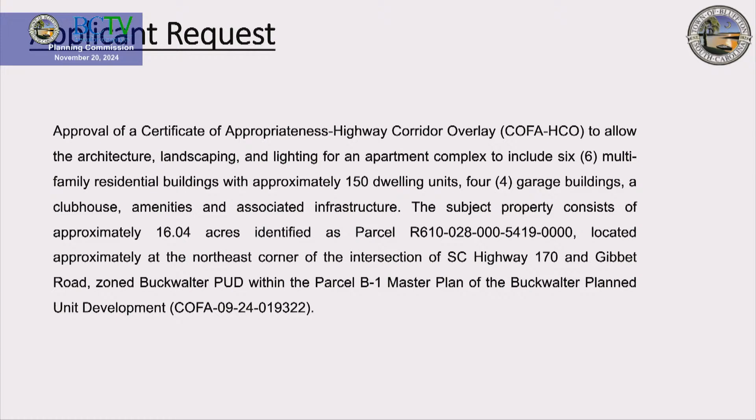Charlotte: Excuse me, thank you for the introduction. Let me get right into it. Again, this is for the architecture, lighting, and landscaping. Dan will be presenting the portion about landscaping. So let me go ahead and jump right into the location of the property. As you indicated, it is a 16-acre property of a former 22-acre tract, located at the corner, northeast corner of Highway 170 and Gibbet Road.

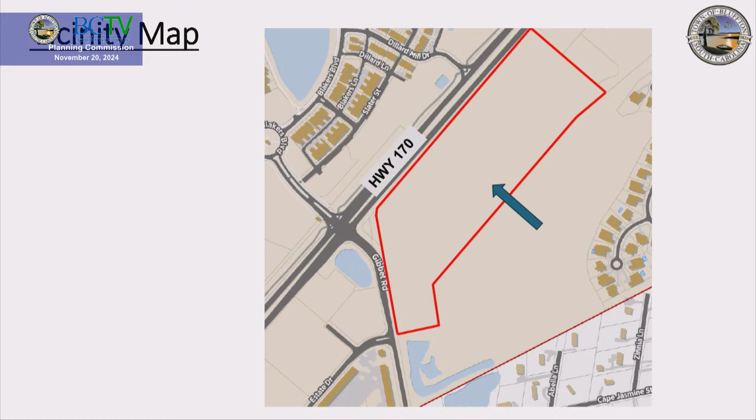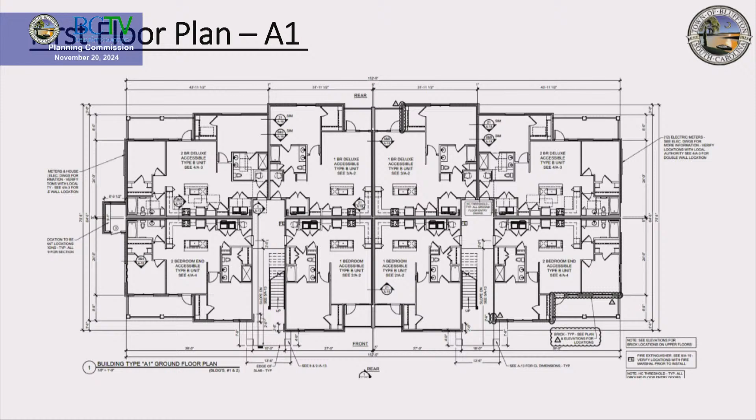So I have a bunch of slides relating to the floor plans, the architecture, and the roof plan for each building. I'm not going to go through each one. These are for us to reference, but I just want you to be aware that I have them all. I have a ton of slides, so I'm going to go through them very quickly.

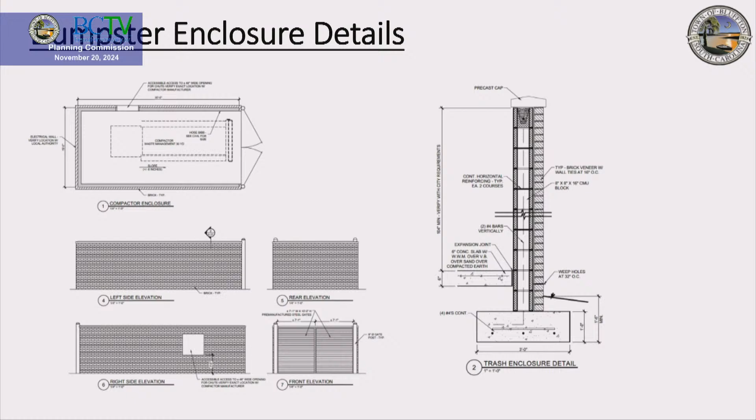And I've got some sections as well. Let me, sorry, there's so many slides here. It's kind of hard to know where to kind of jump in on this.

Dumpster enclosures, mechanical details. We'll need to talk about HVAC placement on the roof. There is some concern with that as it relates to visibility from the highway.

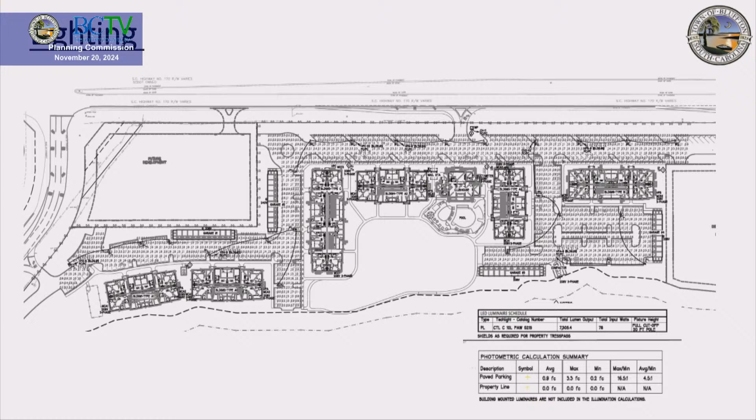And then the landscape plan, Dan will talk about that in just a moment. And then the lighting as well. I do want to indicate that the lighting, the photometric plan that was presented was fine. We did ask for some additional information regarding the various light fixtures. I did receive one with the submittal, and the applicant provided the rest of the fixtures today. So there is no concern with that.

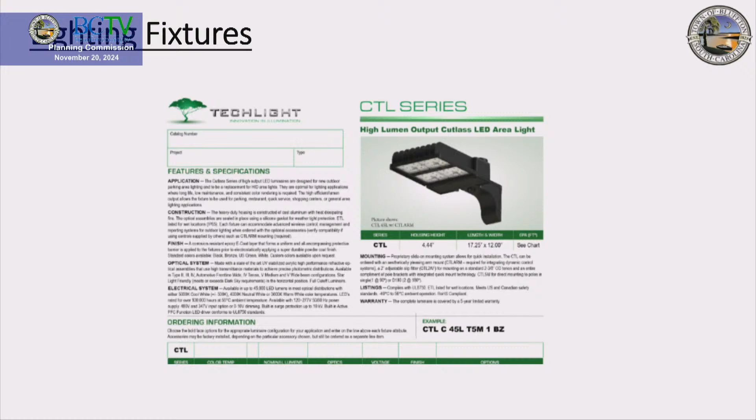Going back through the comments from staff, we didn't have too many, but I do want to talk about them in just more detail in just a moment.

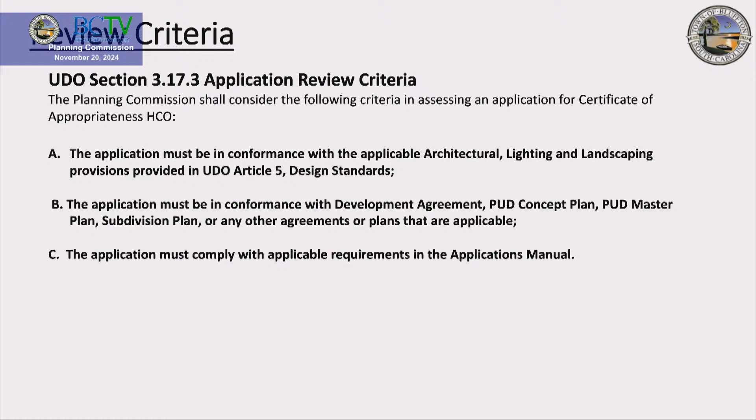As you know, there are several review criteria that have to be applied in the review process and your decision-making, and I have provided them there. This particular application would need to comply with the design standard requirements of the UDO and be in conformance with the Buckwalter Development Agreement, the PUD concept plans, the master plan, the subdivision, and any other agreements that there may be, and also consistent with the Applications Manual.

The various actions of the Planning Commission include approving the plan as submitted by the applicant, approving it with conditions, or denying the application. So I want to go through my recommendations, and then we can kind of back into the plan as well.

There was a little bit of concern regarding the ground floor of each apartment building. When the plan was initially submitted, the front of the buildings had brick going all the way up to the second floor, but in the rear and sides, the brick only went up halfway. There needed to be consistency, and it was staff's recommendation that the brick extend all the way to the second floor. After reconsideration and looking at the plans today, we felt the long rear elevations of each apartment building were articulated enough that this particular recommendation is no longer necessary.

As I indicated previously, the rooftop mechanical equipment is a little bit of a concern, and our recommendation is that it not be allowed to extend beyond the parapet wall, that it be completely screened, and if it should be constructed and be visible, then that could be a reason to potentially halt construction.

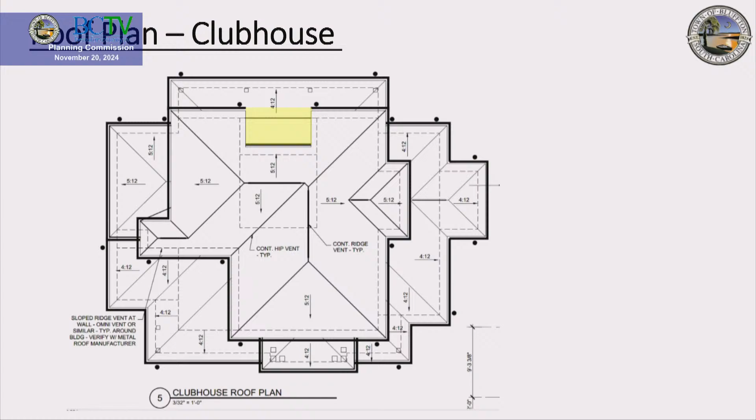Previously there was some inconsistency regarding the height. Let me talk about the roof plan. As you can see here, similar to the other building types, we have the HVAC equipment located on top of the roof instead of on the ground.

I understand there may be some concern looking at it from a side view as you're driving down 170. That front area will be buffered, though of course it's going to take a little while for that vegetation to grow. That's something I think we probably need to talk about in some further detail.

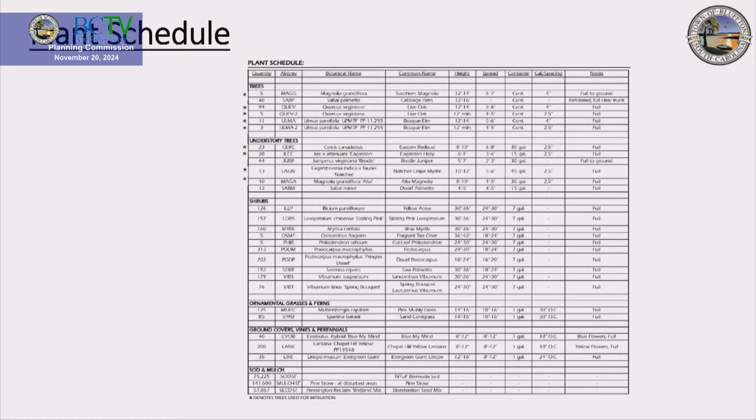While I mentioned buffer, let me go to the landscape plan too. I'm kind of bouncing around here a little bit tonight. Let me have Dan talk about this plan.

Okay, Charlotte just went over the architectural and the lighting. The third thing that's reviewed for the COFA is the landscape plan. We worked closely with the applicant and Witmer Jones Keefer on the landscape plan. Over the entire site, only 2 trees were in excess of 24 inches. So when you drive by and look, it looks like there were lots of trees on site, but only 2 had reached 24 inches. What we worked with them on was one of the requests, the requirement is 15 trees per acre.

The subdivision had been, the subject parcel where the properties are now, it's been subdivided. The applicant is the owner of the parcel. It comes out to 16.04 acres for the subject property. 86 trees remain on site, and what they're proposing in their landscape plan is 31 trees at 2.5 inches caliper, counted 1-to-1, so 31 trees there.

Then 110 trees would be calculated at 4-inch caliper, counted 2-to-1, that's the table on the landscape plan in your packet. So adding it up: 86 trees remaining, plus 31 trees at 1-to-1, and the 110 trees at 4-inch counted 2-to-1, so that's 220. 86, 220, 31 adds up to 337 trees. Over 16 acres that works out to 21 trees per acre, well in excess of the 15 trees per acre requirement. We did work closely with them back and forth.

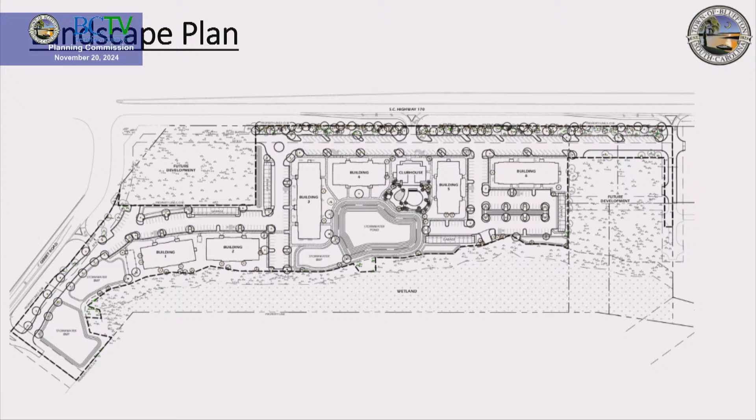Good evening. My name is Adrian Dana Miller with Millstone. We are the owner and developer. Also with me here I have T. Player from Parks Player, who's our architect, and I have Caleb and Brian from Witmer Jones Keefer. We're just here to answer any questions you have tonight and hold any discussion about our application.

So thank you. Just one comment before you go away - when you came to DRC for the HCOD to kind of get a feel for this, it was made very clear to you that we aren't messing around with the tree requirement. I appreciate that y'all paid attention to it.

You're probably going to get beat up a little bit on the architectural in a minute. Just keep in mind, we appreciate what you've done so far. Yeah, well thank you very much. And we appreciate staff working with us to figure that out and figure out a way that we can make it all work.

All right, I'll stay up here and field questions, and if anything gets sufficiently technical I might call on the reinforcements back here. That's fine. Okay, I don't know how we want to start or open it up, but I know there were several of us that had certain concerns with some of the architectural things.

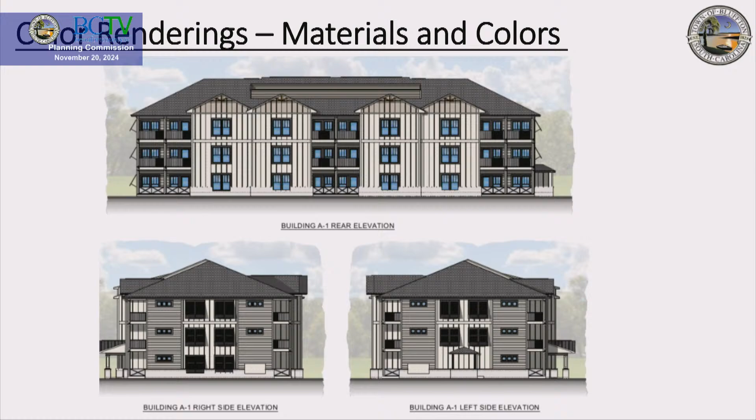Oh, getting lost. Yeah, okay, it's the clubhouse. Yeah, that's why. There's 5s on these, so we're not consistent with our pitches? You just passed it. Which one am I, were we on? Right back to where you were with the yellow. No, that's not it, it's roof plan A, technically, that's what we're talking about.

There you go. So we got 5 and 12s coming down on the front. The gables are 6 and 12, just the same as the ends of the building.

So pretty much any apartment project you're going to see, you're going to have different pitched roofs going front to back, side to side. Why do they do that? It just, why do you do that? Yeah.

Well, the gables are going down like that, so the sides should match that. My opinion would be one of the reasons you do that is because on the 6 and 12 roof, the higher pitch really climbs high into the air and it just looks like a massive roof. So that would be a reason to lower the pitch in that direction a little bit, so the building doesn't look like it's half building and half roof.

It's just a design standpoint. If you keep the same pitch everywhere on the gables, if you drop those down, we feel like they're not going to really meet the intent of the code. And if you do a 6 and 12 everywhere, as Adrian said, it's just going to raise that whole roof up. Just looking at this though, a 3 and 12 into a 5 and 12, and even a 6 and 12, but especially going from a 3 to a 4 into a 5, that is not a small raising. Those are almost the same pitch, so they're almost parallel. That roof is going to come up quite a bit, and I'm not sure it's going to be a problem, but it's something we would need to see.

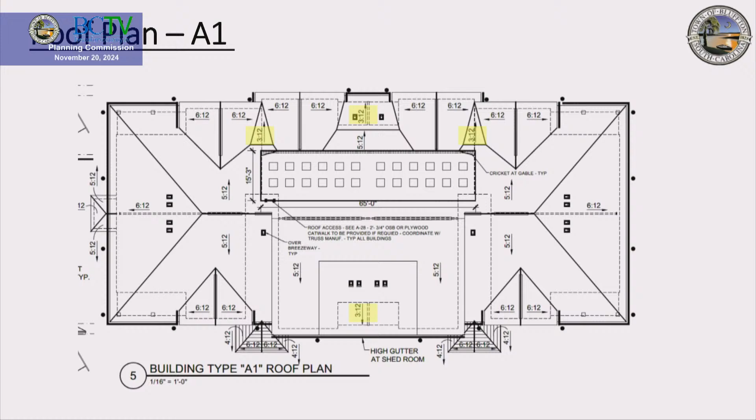While you're on this roof, we're looking at the A1. The board and batten you see right here on this one, do you think that's too wide? The reason I ask is because I know we changed that to 16 inches on center. The clubhouse, I do not recall off the top of my head if we changed that from 24 to 16.

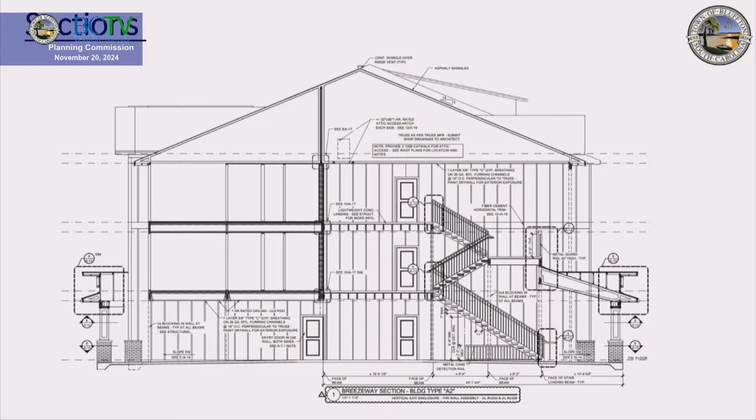That looks wider. It almost does look wider, and I don't see a lot of 12 inches on center - I see mostly 16 or 24. We can do whatever you guys want, but with the elevations here on the apartment buildings, if you guys thought that looked appropriate, or if you would like to see it go down.

I already got lost again. Well, it just ended, so everybody go home.

Go back to the roof plan - go to the cutout of the AC. Do we want to finish answering his question about board and batten?

16 versus 24, or versus 12? We know the 24 is not right, but I didn't know if the apartment building board and batten spacing looked okay to you guys, or if you want that tighter.

That's this one right here. That's correct. Still looks kind of wide.

Let me ask, if we go to one of the sections, like through the staircase - I don't know where those are, but I think it was still really bad. There, okay, what size are those doors?

Those doors are just going to be a typical 80-inch tall, 3-foot wide. So then that board and batten spacing is more than 16 inches.

I imagine, I should say this - on the front elevations, we changed it to 16 inches on center. On the stairwell section you see right here, it is still at 24 inches on center. Just thinking out loud - 24, 20, well...

Honestly, if you got 16 plus 16, that's 32, and you have a 3-foot door with casing on it. So I don't know - it looks like it's still wider on this, I agree.

As you can see, the theme is we need some updated drawings to be able to know what's going on.

Is 16 agreeable, or are you saying... I think 16 could be agreeable, but I don't believe all your drawings are drawn as 16. I think a lot of them look too wide. I'm 100% sure that the elevations on the front and rear are 16 inches on center on the apartment buildings, but not the clubhouse.

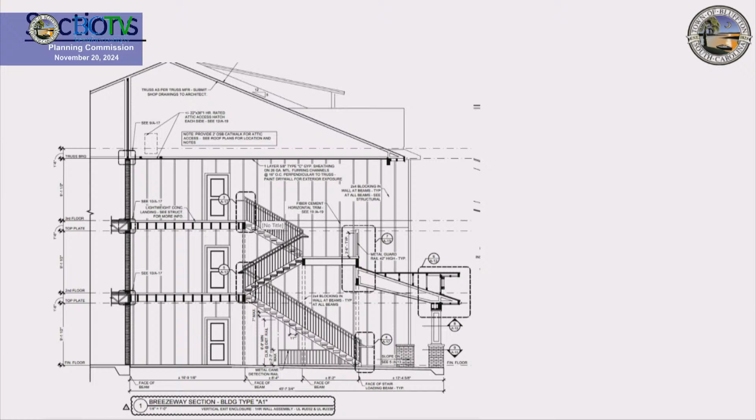Well, how wide are your windows? 3 feet. So they're not 16 - that's the side, he's saying the sections are wrong. No, the front elevation of the buildings, if the windows are 3 feet wide - the clubhouse?

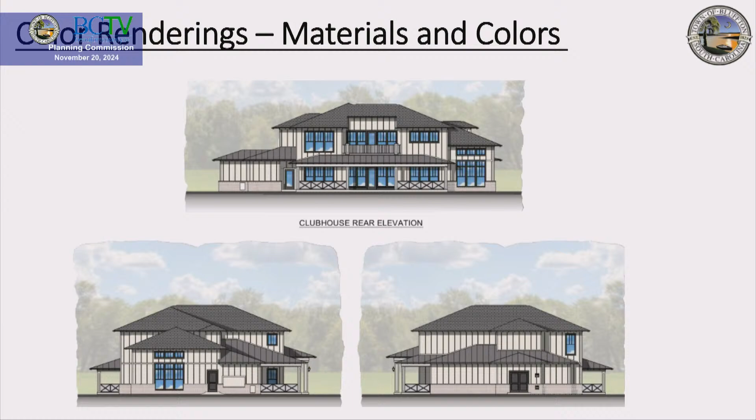Not the clubhouse, go to the other apartment building - Apartment Building A. Pick any one you want. Pick a building, any building.

So if those are the ones centered in the gable end, and if that's a 3-foot wide window, those are not 16 inches on center. Are you sure it's a 3-foot wide window?

Gotta need that for egress. Well, yes, you need a 3-foot window for egress, but I'm just saying I think 16 could look good. I just don't believe these drawings are drawn to be 16 inches, which is part of why we're having the reaction that they're too spread apart.

I'll be all right with 16. At the very least, it's inconsistent between the pages, and the clubhouse and the building. All right, well, let's move on from that. It sounds like we need to revise it, make sure it's all consistent, and confirm all that.

Okay, so now Charlie's thing was, are we okay to move to Charlie's AC unit section? Charlotte, please? We dealt with the architects, now you gotta deal with the AC guy. We're not done, I know, we'll get back to you still. This is a commercial break. If you pause.

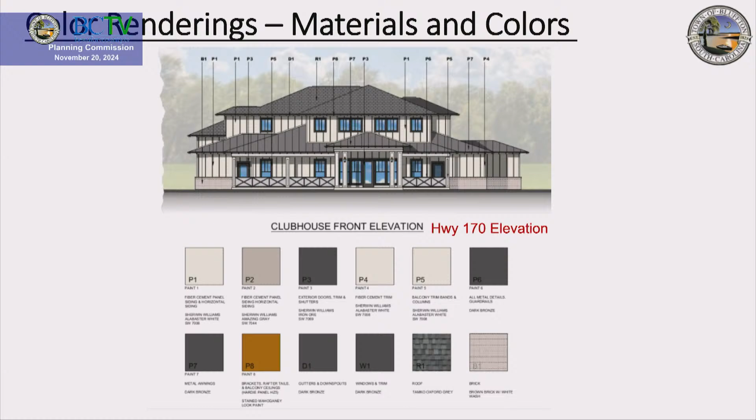Can go to the, well, there's your rooftop drawing, but I'm looking at the section height through it, the cutout of it. If anyone to my left, other than Charlie, has any comments, please feel free.

No, I said 16 on center for me is fine. I think that makes sense to Michael too. I like that, so I'm good. And I'm okay with 16.

Let's just be clear with what we want from them. You're showing units at 33 inches tall. You're showing a parapet at 42 inches tall.

Actually, before I get into the measurements, this is a cutout. The parapet railing will go on the sides as well. Correct, that's correct. There'll actually be roof on the sides that screens, just come down into the roof. Well, yeah.

It's not tall enough at 42, and I'll tell you why in a minute. You do not want to build a 42-inch wall and put those AC units in and have them visible, because they will shut you down. That is one of the things that's very, very much a no-no.

We let a couple buildings get away with it and it looks horrible. You have 33-inch tall units, let's assume that's correct, even though refrigerant's changing and dimensions are changing. They have to be put on, at the very least, 4x4s on the roof, they won't be sitting directly on it. So now you've got another approximately 6 to 8 inches. You're talking 33 inches plus 8 inches, now you're up to 41 inches with a 42-inch parapet. That's way too close to risk on.

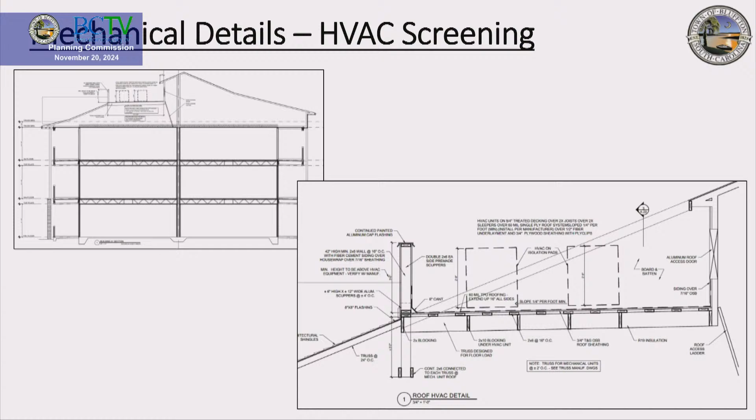Agreed. Can we look on that same point at the side elevations, please, of any of the buildings? Not the clubhouse, but the apartment buildings. So where is, if you look at the rear elevation of the buildings, I guess maybe we should start there and then we can get to the sides.

If you could flip one more. So it looks to me like that parapet wall sticks up beyond the side gables, and it doesn't show up anywhere as any type of visual on the side elevations. So what are you planning for that? I mean, to be honest, until I look at the section, I can't tell you exactly where it's going to be, but it's above the ridge, it's going to be above the ridge, the top of the parapet, potentially.

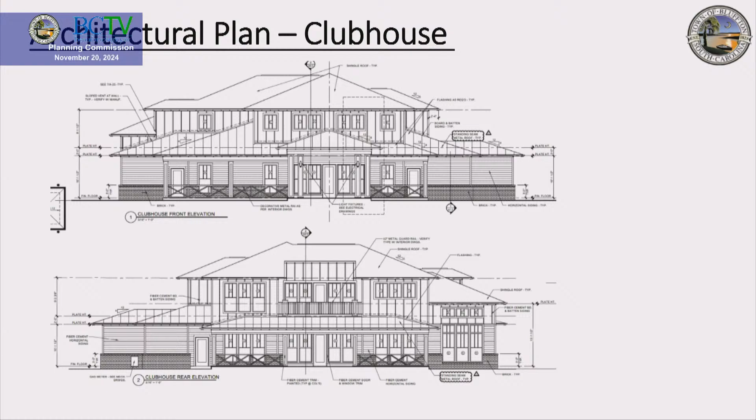Can we go back to the other view? In general, she's just saying it's not shown, the one showing the rear elevation. Unless it's blocked. It's not. It's higher than those roofs. You were on the right, it was just one sheet up from where you were before. Yeah, wrong way. More than likely it was just a missed detail.

There it is. The issue I have, though, is that two of the buildings, 3 and 5, I believe the short end of the building is facing 170. I think it's up to you how you want to handle it, but from my perspective, I do not want to see that tacked-on parapet wall from 170. So if you could raise the gable on the ends to have the ridge of the gable higher than the parapet, or put the parapet down lower in the roof, or something.

Or you can put it back further. I don't know how far you would have to put it back so that the walls can hide the parapet wall. But I'm not sure that would be practical. And I don't know how everybody else feels, but I don't think usually when we have parapet walls, it's not like an architectural parapet wall, it's really just kind of tacked on.

So can we go to the site plan real quick for this discussion? I think it shows on there where these are located. I'm hoping it kind of does. It's really small on here, but you can see how these mechanical wells are all positioned to the rear of the building. But there are a couple that could potentially be seen from 170, the ones that face buildings 3 and 5, running north-south instead of east-west. Yeah, 3 and 5, and we're going to be talking about the ends of those buildings too.

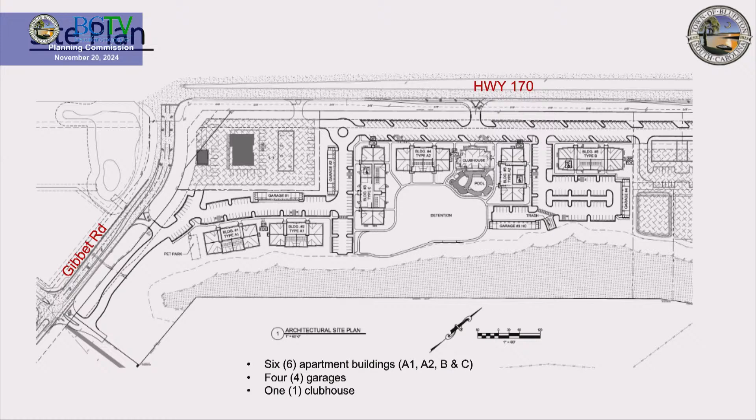While we're on those two specific buildings, 3 and 5, unless you have any other roof or AC issues, I think there were some issues with meters or service things on that side, on 170. And that is our HCOD, so that's our main view. Yeah, and those do need to be moved, the screen, the electrical, and the meter panels. This is Highway 170, what we're here to discuss.

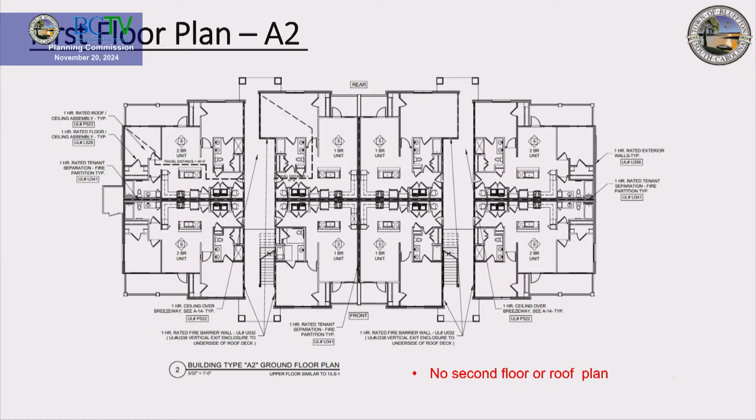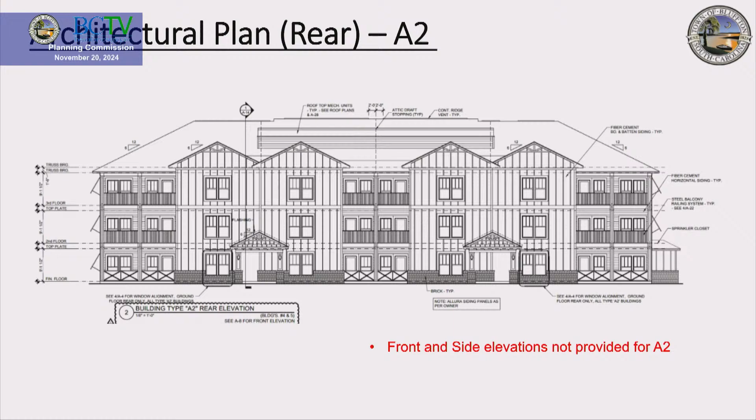I'm going to take this one too. So, obviously we're going to work with the local utility company, and they typically provide a plan. A lot of times they have a lot of say in where the meters go, definitely where the transformers go, but probably we'll be able to work with them and move them away from the side facing the building. That design is a placeholder on our design because the final location is typically something the electrical company has input on, and we have input as well.

So I think you're going to have to look at that, but I think we can move them to a different location. What if you put them there and you put up a screen wall and landscaping in front of it and stuff like that? Is that something you've thought on?

As a non-architect, okay? We're dealing with apartment buildings, dealing with mechanicals that oftentimes are on the ground, not up on the roof. The meters end up on the end because all of the balconies and so on are there.

What if we had them make it look like it was a front courtyard? Like the front of a house with a front brick courtyard or something like that, that you would see. I think if it was designed and not just stuck on there.

We're tasked, like we said before, with making sure this building presents itself, no matter which side it is, like it's the front of the building. If you were CVS, you'd be really pissed at us right now, because we're dealing with that with them.

So tell me that again, what you're suggesting about the courtyard. Can you elaborate a little bit more on how that would block the actual panel? Are you building a wall panel up, or?

Well, I think what he's saying is if you built out a wall, like a courtyard, and the panel was behind there, you wouldn't see it from the road. It shouldn't look like a service yard. Not a service yard, but like an actual architectural feature of the building.

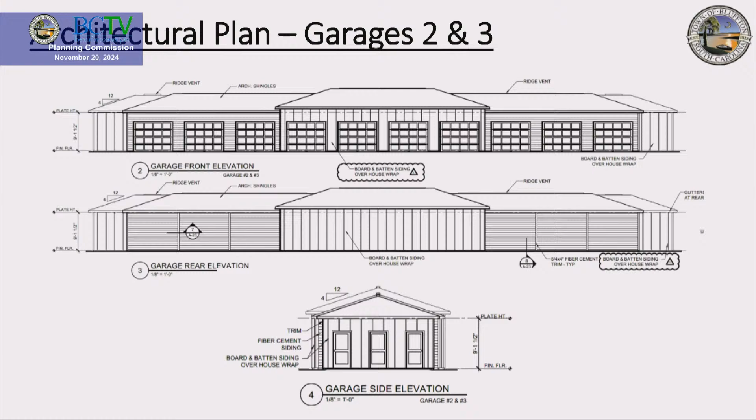Okay, so if we finish that, do we need to go back to the other buildings where we had... Yeah, take us back, Charlotte, to the end unit. The Bahama shutters.

Any of the end ones, yeah. You passed it, it was back a little. Nope. There you go. Is that it? That's a different one, that's a different one.

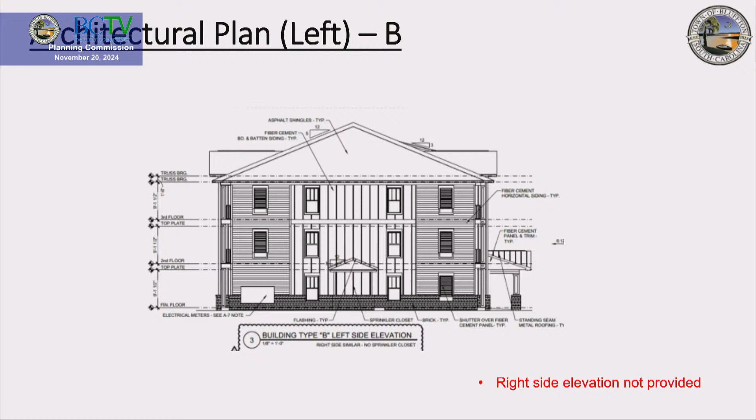Building B and that. Type C and type A are what we need. Building 3 is a C and building 5 is an A, because that B would be a lot easier to make look like the front. There's a couple more there, maybe two. C or A, C or A would be.

So we're looking for- the electrical meters are fine on the side. We're looking for left, they don't face us, that's C, this is it. Yeah, this is it, left elevation, so the right-hand side of this screen. And then left, A side. This is left C. Then A is gonna be the right-hand side. So it's this one here.

Is it possible to flip-flop that? Because it does just aesthetically look even less like a front elevation with the little shed.

Is that it? Something else that dresses that up a little bit. That little room is the fire sprinkler riser room.

What about a fake door on the front of it? Make it look like a front door. Would that work? I mean, we really could put a real door in it, but, yeah.

Fire chief might want it. If you can put a real door, even if it's like frosted or whited out or whatever, but it has some glass on it that makes it look like a real front door, that would help.

So those are just on the two facing Highway 70, correct? That may be enough, don't you think, or do you? Yeah.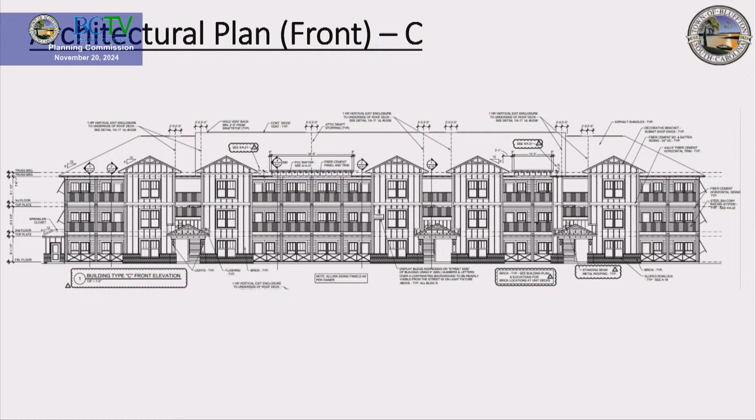But let me be clear, if they do the fake door, where did we leave them with the Bahama shutters? We are doing them, but well, I'm agreeing with Lydia, I just want to be clear to that. I'm agreeing with what Lydia suggested on the Bahama shutters. Anybody else, Michael, right, do you have an opinion?

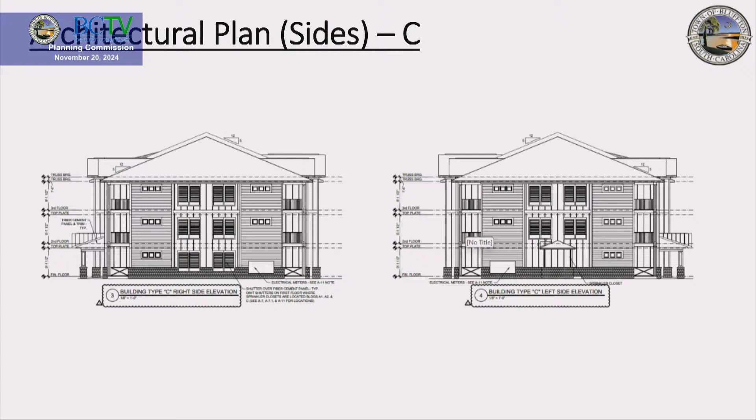I do, but I would like to hear it. I'm fine with what you guys are suggesting. I think it's a little silly to ask for fake doors and fake things. Make it real or don't make it.

We've already considered putting a courtyard on that side. Let them figure out how to make a design with a courtyard on that whole facade on the ground floor. Why are we trying to put a fake door on something? That's silly, asking them to put a fake door on it. That's my opinion that I'm giving to you.

So if that was a courtyard effect, that would eliminate needing to do the door. Well, it still needs to look like a front. I think it still can, depending on the articulation of whatever that courtyard is. I can't decide what that looks like, that's not my job.

When's the last time you walked up to the front of a house and there was no door? A side yard house, yes. Charleston, and all the streets in Charleston. Not all of them, but a lot of them. A lot of them, good point.

When we bring these back, they will look more like the front of the building. I promise. And you only have two.

So what about your view on the shutters, or the Bahama shutters? Do you think, as far as the fenestration, nothing there versus something? Even though we know that those are false areas. Even if those are false, I think it's fine.

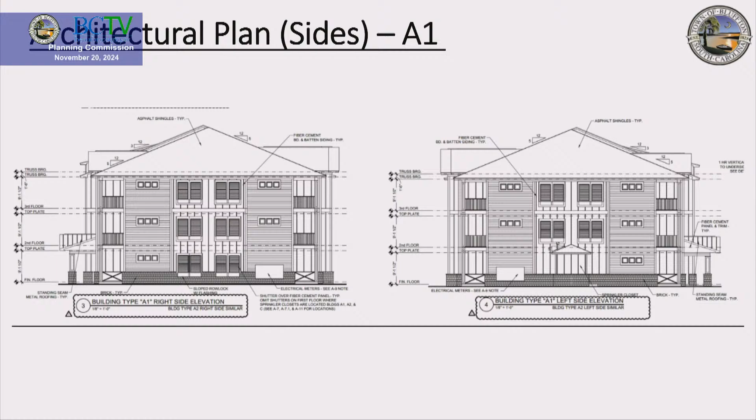So we have the electrical panels, we've got the riser room, and the shutters we settled. We just need to do some work on this to make it look more like the front of the building. Other features that add fenestration or might add some visual interest are like little metal shed roofs, little short guys, things like that. I don't know if any of that resonates with you or would improve this.

I'll sit down and think about it for a while. We can come up with some other things. I just want to try to go in the right direction, that's just getting closer and not further away.

What about, there was a comment from the town about the brick height. Before they had different levels and now they've made it consistent, which they did what we asked. But the town had mentioned they wanted it higher. Does anyone have an opinion if it should be higher or if this is an appropriate level?

I think the town, I don't want to speak for them. It was just in her slideshow that said something about higher. I thought that they thought that was a comment that originated from you guys, but I don't know for sure. Do you, Alan, agree?

Not aware of the DRC comment. Oh, okay. That discussion, I was not at that meeting, but it seemed there was a desire for consistency on all the elevations, not necessarily that the brick needed to go to the second floor.

I think it would help proportionally if it went up to the second floor, but I understand if it doesn't. At least it's consistent. The only thing I started to think about, now that we've been talking about this courtyard effect, it might actually help tie in the courtyard because it would be tall and then you have the brick element. But that's a creative design thing you need to think about.

Okay, do we have a list? Yeah. We do. Okay. Let me, the motion will probably be along the lines of with the list that staff has previously read. We can work through it right now and make sure it reads correctly. I feel like Katie's back. So my suggestion would be, let's identify the ones perhaps we want to eliminate of the staff recommendations, and then we can approve staff recommendations, identify the numbers that we feel are appropriate from the staff recommendation, including the determination regarding the lights, and then we can fill in the recommendations, the conditions that you have for tonight. Does that make sense? Yes. Okay.

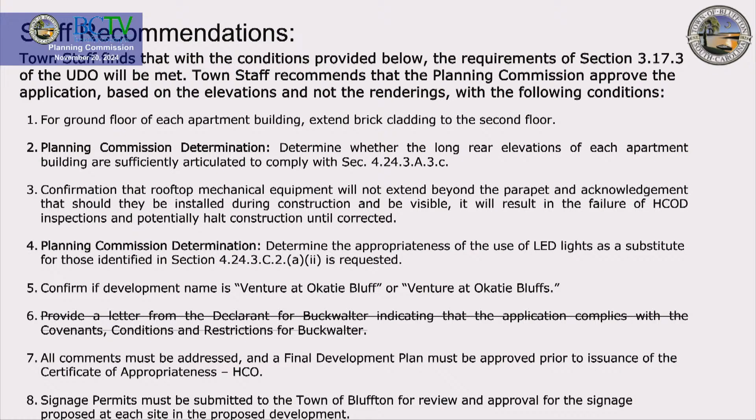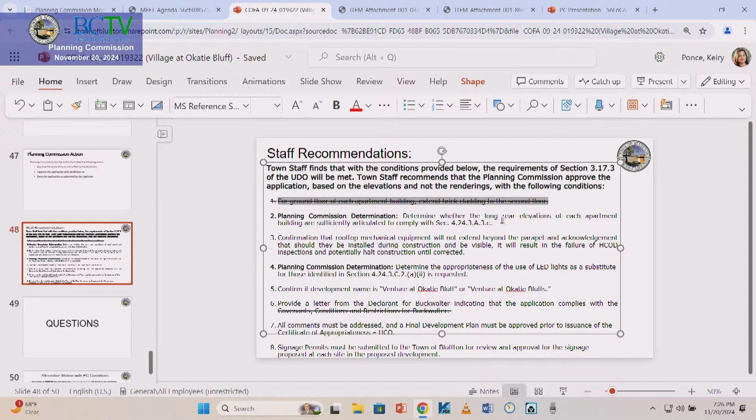So for staff recommendation 1, do we want to eliminate that and allow the response to the brick as presented tonight to remain? Okay. Let me see if I can do it this way. Great, as capable as Katie was. So I'm going to get rid of 1, can I do that? Okay, the determination, we're going to get rid of number 2 as well. Is that okay? Yes, because we talked about the porches and patios and. Oh, that's cool, I didn't know you could do that. I did. So, learning something, yeah.

We might want to talk about number 3 separately, as we discussed tonight. So should perhaps I just eliminate, strike through this one? I think you should leave 3 there because I think that does the intent of it. Okay, yeah, agreed. Okay, so I agree. And we're not talking inch measurements, you guys know. Yeah, okay. Can we add to that one that the parapet be on the sides and not visible from 170, please? Show the parapet on the side elevation and have it not face 170, or be visible from 170. You like that bracket? Is that correct?

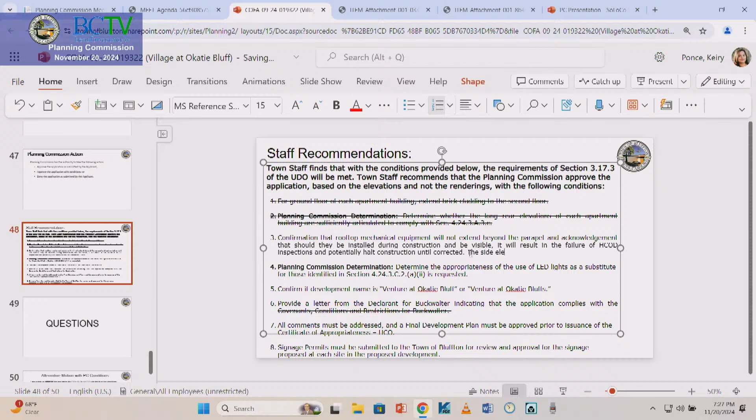Is that correct? Side of elevation, okay. Turn to number four. And I think number four, we all agree with the LED lights, leave it in. And we know this one is going to be Okatie Bluffs. All comments must be addressed, final development plan be approved prior to issuance of certificate of appropriateness.

You want to add in that, or is it separate as far as town staff to consult with planning commission members? I would make that separate. Developer meets with staff, and staff is consulting with us. So if staff has an issue or a question, they could consult with us. I'd say this is a pretty simple task on our part.

There's a bunch of items they can do easily, just a couple we want to make sure of. If staff's not sure, then they'll reach out. So you don't have to change the language, just send the new plans to the three of them for feedback. I would be comfortable with that. Yeah, we're just making sure it's captured, okay.

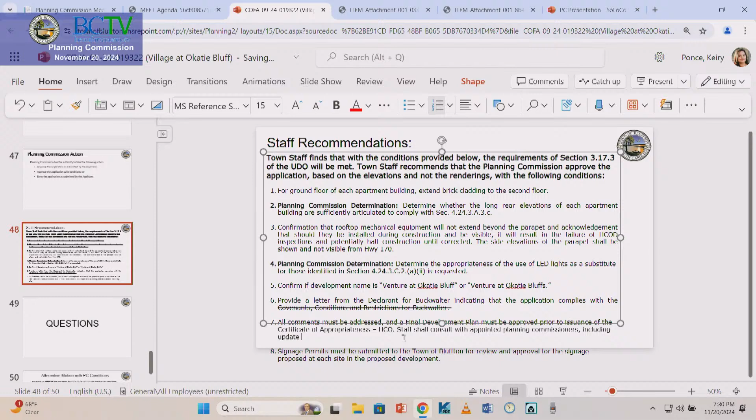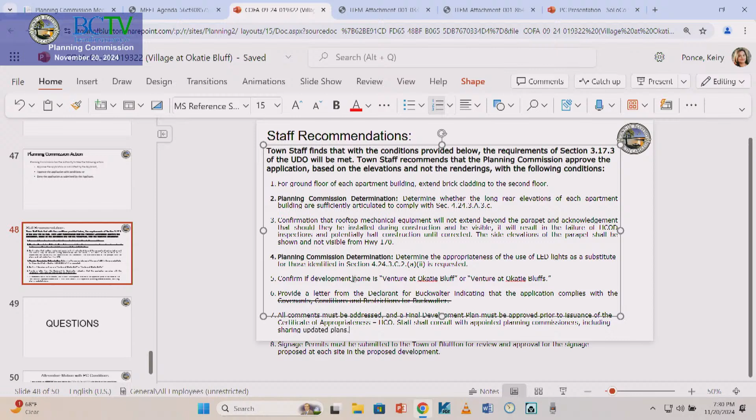Appointed, okay, and I do have that there, sharing updated plans, yeah, sorry. That's good, that's good. Signage permits, so it looks like three, four, five, seven, and eight.

So this is where we get into tonight's conditions. The first one I have, and Dan, you may want to back me up on this. The board and batten spacing was to be consistent throughout all drawings. Did you just say max of 16? That's what I was about to say, to be 16 inches on center, maximum, so if they decide to do less and it looks better, they can. Is that correct?

Remove all dormers from buildings? Yes, right, all of them. I would say if they want to come back with a different articulation of a dormer, I don't think they need to or want to, but it's not that you can't have a dormer, it's just the way they're currently shown.

The clubhouse roof cutout. Remove or revise dormers as discussed. I'm not really sure, roof pitch. So remove dormers, if they agreed to that, that's... yeah, remove dormers or revise the dormers. You can just leave it open like that, and we'll do one or the other.

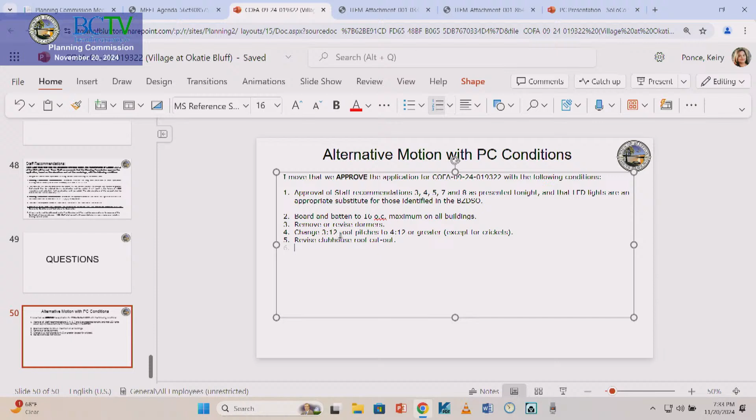Got the meter banks. So the meter banks that are shown on the fronts of the building on the 170 elevations need to be moved or... yes, you could say cannot be visible from 170. Got to be a little more restrictive than that, because you could put a service yard around it and it's not. Gotcha, okay.

I would say either relocated or appropriately screened with an architectural element. That was a good word. It's almost like they're architects here. I'm not an architect. You got that one, Amanda. You did all my... I want on TV. Not this TV though, speaking of which, we're gonna add a third floor.

The Bahama shutters, oh yes, I would say the Bahama shutters. How do you, 170 facing elevations need to present as fronts. One possible solution includes sizing and tilting the Bahama shutters to conceal the false panels behind them. Other solutions are possible if they want to come up with something different. Okay, let me start that again, one suggestion.

Buildings 3 and 5 only? Just the 170, yeah, 3 and 5. I'm sorry, Commissioner DePaul, could you restate that? Should we just say for buildings 3 and 5, the 170 facing elevation?

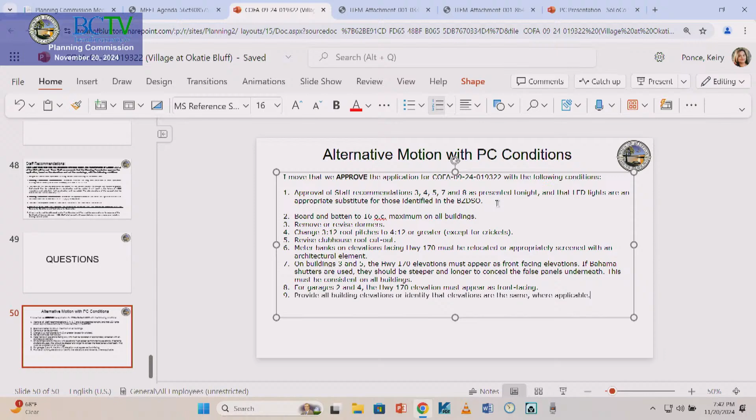Okay, so with that, someone want to make a motion? I move that we approve the application for COFA 0924-019322 with the conditions stated in the alternative motion with PC conditions, conditions 1 through 9. Do I have a second? Second. Any further discussion? All those in favor, say aye. Aye. Any opposed? Okay, we look forward to seeing the rest of it. Yes, thank you, we got a little bit of work to do.

Thank you. Item number 2, adoption of the 2025 Planning Commission meeting dates.

I have to go too, I think we get a bathroom break.

I think everybody's probably okay with these. Anyone have a discussion on that? No. So, it's a motion, right? I move to adopt the meeting and application submission schedule as written. Second. Any further discussion? All those in favor? Aye. Note, Charlie did not vote - he has walked away.

Number 3, adoption of 2025 Development Review Committee meeting dates. Everyone okay with all of that? Do you have a motion? So moved. A second. Okay, any further discussion? All those in favor? Aye. Charlie Whitmore is not present.

And we've been waiting for you. This is a discussion for amendments to the Town of Bluffton's Southern Low Country Stormwater Design Manual. I'm Andrea Moreno, the MS4 program driver. I've met a bunch of you, but thank you for having me, I appreciate your time. We appreciate you waiting. So this is going to be a stark contrast from everything you've talked about tonight.

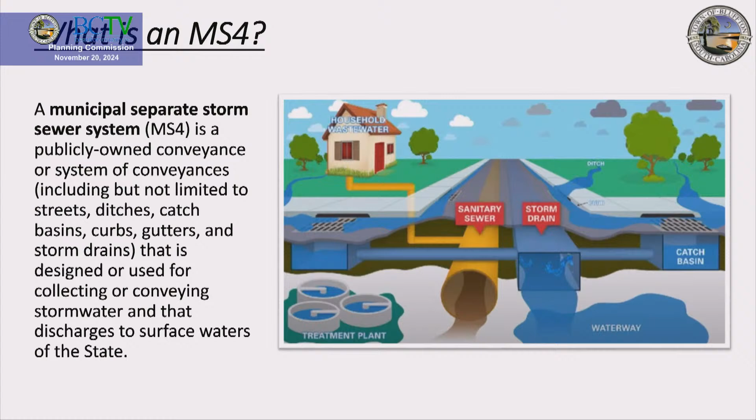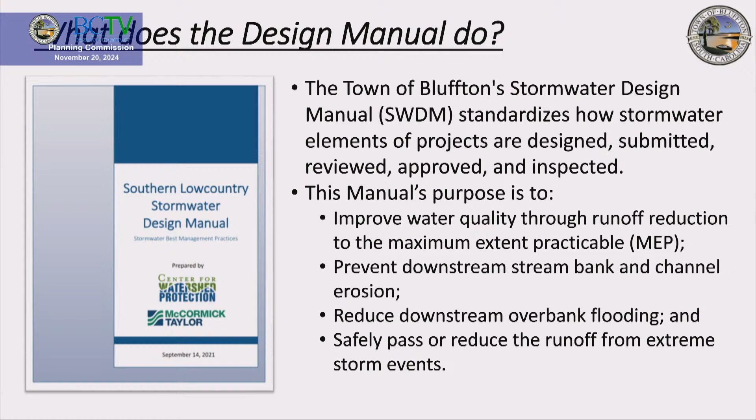When the Soloco Regional Board got together, they came up with the idea of standardizing a set standard for stormwater design and guidelines. The result was our stormwater design manual, adopted in September of 2021. Its purpose was to improve water quality through runoff reduction to the maximum extent practicable (MEP), prevent downstream stream bank and channel erosion, reduce downstream overbank flooding, and safely pass or reduce runoff from extreme storm events. With this background, we are looking to better align ourselves with other Soloco partners, namely Beaufort County, and also align with UDO language passed in April and May this year that better supports what we're trying to do.

And some of the language is like verbatim in the design manual as it is in the UDO, so that's just trying to match it.

We're also trying to provide clarifications on implementation of stormwater practices, enhance our enforcement capabilities through our post-construction program of these pre-MS4 communities. As a reminder, the town became an MS4 in 2015, so we've been doing post-construction inspection and maintenance of anything built after 2015. But through these edits, it'll give us enforcement of pretty much anything pre-2015.

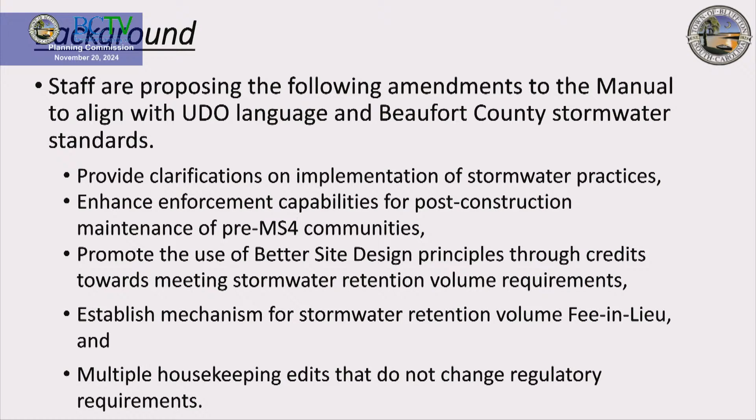We're also promoting the use of better site design principles through credits towards meeting stormwater retention volume requirements. And we were hoping to establish a mechanism for a stormwater retention volume fee in lieu. There's also multiple housekeeping edits, like scrivener's errors that were overlooked before they were adopted. I'll get into each of these.

So again, with providing clarification on implementation of stormwater practices, just a couple examples. It's been 3 years since it was adopted, and we're just trying to better align the intent of the manual with what's happening out in the field. Have a more realistic approach, I guess you could say.

One of the things we're hoping to change is our 10% analysis. What that is, basically, engineers, developers, applicants are required to analyze 10% of the watershed downstream of their site to show that this development isn't going to have any negative impacts on downstream properties or watersheds.

There's also the requirement that sites detain, meaning hold, up to the 100-year storm. Prior to adoption of the manual, it was 25-year, just to give you a frame of reference. So sometimes it can be conflicting. When we tell people you need to detain for the 100-year, it could actually mean that through that 10% analysis, it can be detrimental to the overall watershed.

Obviously, that's not our intent, right? Our focus is on the watershed. So we have proposed amending the 10% analysis language so that if they can show through their analysis that detaining the 100-year is detrimental to the overall watershed, they don't have to do it.

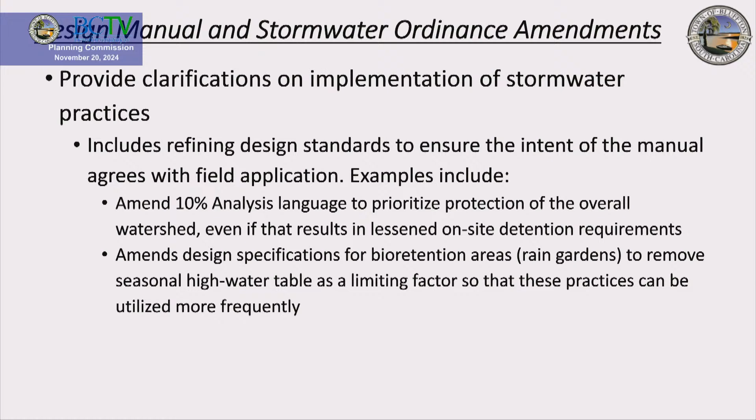As we know, our area, especially the sites that are left around here, have poor soils and a high water table, right? So it makes it pretty limiting what BMPs can be used there, but we don't want people to say, oh, we have bad soils and a high water table, so sorry, we can't do anything, right? So this is just a way to meet in the middle, if you will, so that people still have an opportunity to do these infiltration and filtration practices that we want to see.

So then we're also going to expand our post-construction program to encompass beyond MS4 communities. The 1991 Sediment Reduction Act basically stipulates that the state or an acting inspection agency can enforce maintenance of communities that are built after 1992.

It's always existed. Technically, the town has always had the capability of doing so, but without explicitly referencing it in our post-construction ordinance, it can be a legal gray area.

So what this means is, again, we're looking at these pre-MS4 communities - Hampton Hall, Hampton Lake, the farm - pretty much everything in town that is having issues, right?

So we are receiving some annual inspection reports. Hampton Lake and the farm do provide them, but with these manual changes, every community, including commercial, not just residential, will be required to submit them. What it means is that they'll just be roped into our post-construction program.

Meaning that we will reach out and say, hey everybody - because obviously they're not expecting this - you are now required to give us your inspection reports showing us that you have taken a look at your stormwater system and shown that it has functioned properly and everything like that.

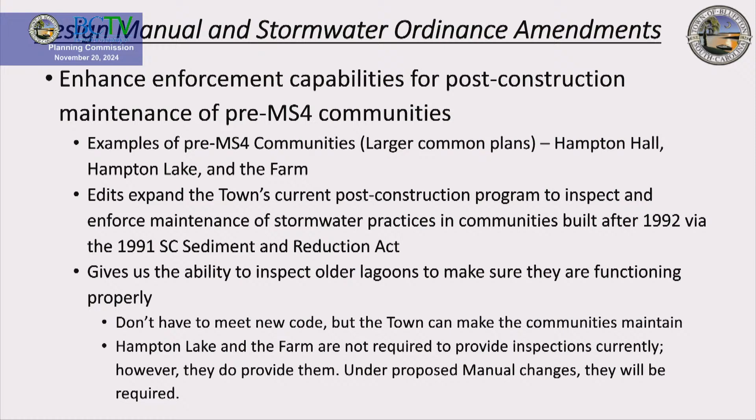If they don't fix anything, same with our current post-construction program, it follows Article 8 of the UDO, which outlines all the penalties and enforcement. So again, it's not something the town couldn't have ever done before, but certainly it's beneficial to have it specifically outlined in our ordinance that we will be doing this.

The next thing is promoting the use of better site design principles through credits towards meeting stormwater retention volume requirements. The manual has always had a conservation area concept. Now applicants submitting for stormwater have to fill out a compliance calculator, an Excel spreadsheet where based on their site size, soils, pre-development and post-development land totals, they determine how much stormwater retention volume they're required to retain on site.

But the conservation area piece that's always been in our manual was never provided as a credit in the compliance calculator itself. So this change is just putting that conservation area into the calculator so there really is an incentive for developers to conserve areas of land as natural cover or revegetate them as natural cover.

In this graphic, Plan A shows a 5-acre site with D soils, which is bad soil, 35% impervious, and 5% BMP, your best management practice. Don't pay too much attention to the blue, it makes you think pond, but it could be any stormwater BMP. Here all their cover is managed turf, which means they're going to have a larger BMP required on their site.

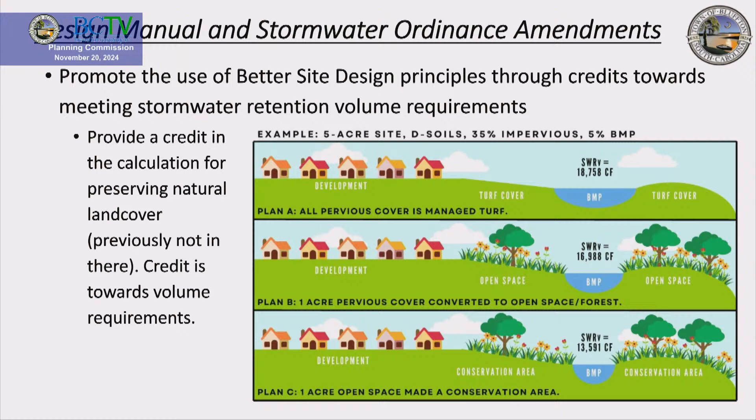Also something outlined in the stormwater design manual, but the mechanism to incorporate it has never been established, is the fee in lieu. Some background: when an applicant comes in with horrible site constraints, meaning usually a high water table and poor soils, or even just the size of the site being a constraint, they submit for an MEP, a maximum extent practicable submittal.

Essentially there are 11 criteria, and the 11th one is fee in lieu. So before this is adopted, there are 10 criteria they have to meet to show beyond a reasonable doubt that they've tried everything they can to meet our stormwater design standards the best they can. That's great, and that's what we have right now, but the fee in lieu basically establishes a fee to pay for that shortfall in retention volume.

Those fees would then be put into a stormwater fund so staff could implement projects in that same watershed to kind of make up the difference with BMPs. The fee in lieu unit cost would be the unit cost of retention volume, so whatever they aren't able to keep on their site, they then pay that towards the stormwater fund.

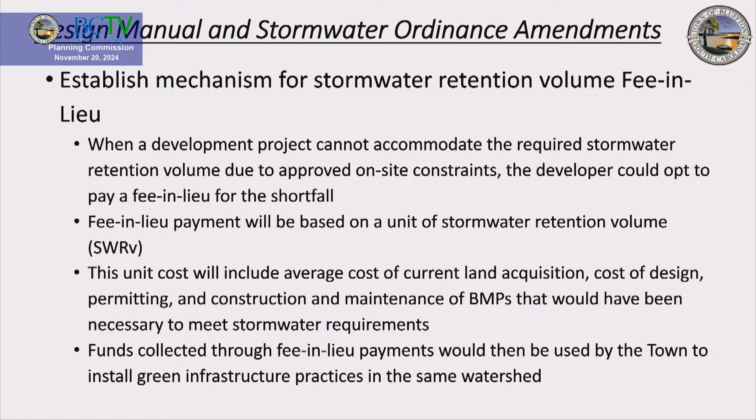The fee in lieu cost, because it'll be based on average cost of land, cost to construct a BMP, cost to maintain a BMP, design, permitting, all that, will be part of the master fee schedule. That won't happen until fiscal year 26, going through council and the budget cycle. So this is just the text piece, but the physical dollar amount, that unit cost, will be part of the master fee schedule and updated yearly with the regular budget, so it hopefully will always reflect current costs.

We also have multiple housekeeping edits that don't change anything regulatory-wise. For example, several appendices weren't even referenced in the manual. As a regional manual, our intent was always to keep it broad and somewhat vague so it could be reflective of Beaufort County or Jasper County. But we've received comments from applicants that this feels misleading, since they wanted something more town-specific to the process, so we've implemented that too.

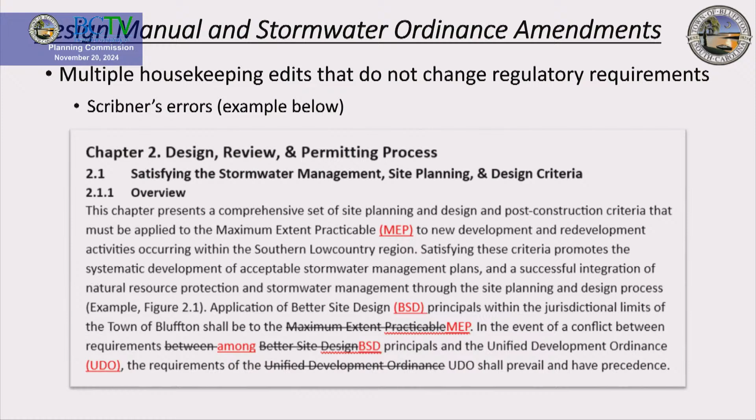We've already gone through two rounds of public comment with the design community, and met with a technical subcommittee to make sure all Soloco partners are on board with what we're suggesting. We've also already met with our consultants, CWP, the Center for Watershed Protection, who are the original authors of the manual. If anyone knows its true intent, it's them, so we made sure they were involved throughout, ensuring what staff and applicants were proposing wasn't steering too far from that original intent.

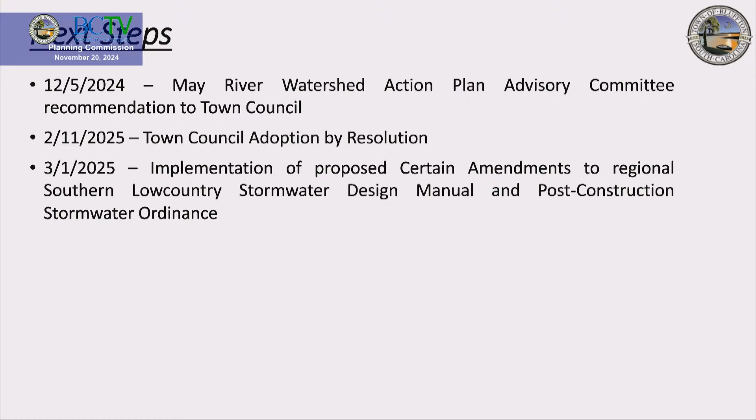Our next steps: we'll be going to the Watershed Action Plan Advisory Committee, WAPAC, next month, then it'll go in front of council for adoption via resolution in February. We're hoping for an implementation date of March 1st.

Any questions for me? Nicole? Yes. Yeah, go for it.

So, a lot there, but going back a couple things. When the town requires stormwater management plans or implementations for retention or master stormwater systems, like Hampton Halls ponds, are you going to require that? I thought it was already required in the past, because I know my community has had to do inspections and had consultants come in and report that to the town.

That was just a phase they were trying out to see. It's kind of a wonky thing in that the UDO, adopted in 2011, did outline an annual maintenance inspection report program. At the time, because I was here then—well, not in 2011, but when I was brought on—no one was doing post-construction inspections until we became an MS4, and that triggered me doing all erosion sediment control and post-construction work. So it was a staffing issue in the beginning.

We slowly phased into the post-construction program because it's a bear, and then started just focusing on anything built after 2015. An email did go out to everyone requesting them, and then it gets confusing because the Soloco manual was adopted in 2021.